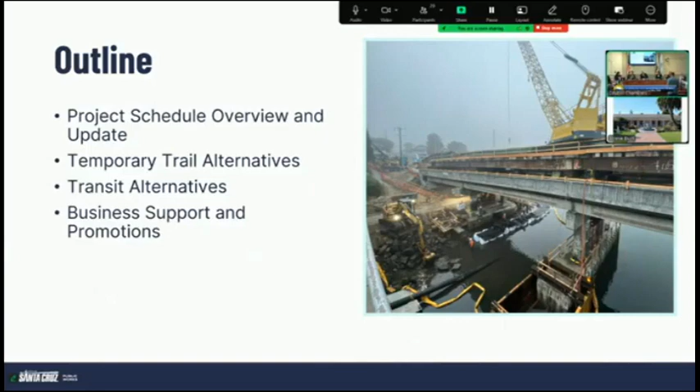We've got a quick outline of what we're going to cover. I'm going to touch on some key information about the project schedule, try to unpack why we're talking about a 3-year project, touch on how the project's funded. That becomes very relevant when we get into talking about what mitigation measures we can implement and how we pay for those. Then I'll hand it off to Matt to talk about trail alternatives we were directed to explore and other transit alternatives that have been put on the table. Finally, we'll close out with some other business support wraparound options.

Starting with some important things about the project schedule. There are a number of factors and considerations that go into how the contractor and the city came together to come up with the schedule we're operating off of. The most notable is that we have longstanding permit restrictions on when we can do certain activities in the water. Those are mostly designed around protection of marine life, specifically steelhead, one of the key species of concern. Multiple permitting agencies overlap with their permitting language, and those come together to represent the biggest challenge we have on a schedule front.

Some of the photos are all very recent. They speak to what we're doing right now, which is work in the water. We're pile driving, and that's really step one for the major construction on this project: building up below water to the water surface and up to the bridge deck.

Project sequencing, I just spoke to that. You can't start building a house from the roof down. You have to start from the foundation up. So we're doing the same thing on this bridge retrofit.

Maybe not a visible but really big piece of this project is relocating a sanitary force main that serves the entire county regional sanitation district. Roughly 5 million gallons per day flow through that pipeline. Part of our retrofit project is in conflict with that line, so providing a new home for that pipe is an important part of the sequencing discussion.

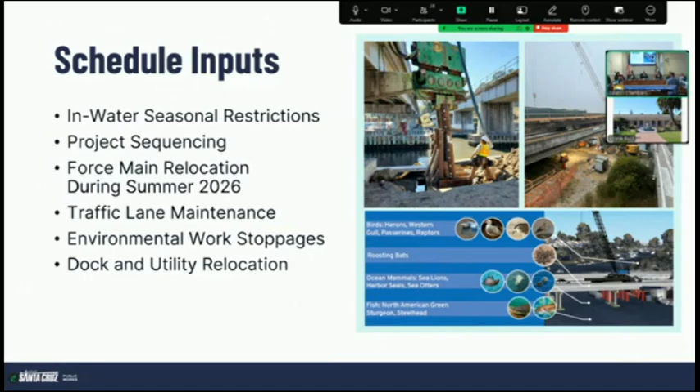This is the really simple version of the project schedule. The actual schedule is 18 pages long, and we're at the front end of the project, as you can see, through probably month 3 of the first and longest shutdown. I want to make it clear that there are 2 long full closures. We're in the middle of the first one, and there's a second one planned for next year, after which we're talking about 1 to 5 day closures to finish up resurfacing of the bridge deck and other minor things. This speaks to the sequence you have to build.

I mentioned pile driving, that's where we're at right now. We're taking care of all the pile driving we can this summer in the water, and then we'll be moving to the land-based piles.

There's quite a bit of that in the early phases of the project. Next summer, the big main event is going to be relocation of that force main. We're hopefully going to be out of the water by the end of next summer, which is a really big milestone because you start to get away from having to work in certain seasonal windows, which is a key thing for our contractor to then have more flexibility to progress on the work.

We've had some questions about Saturday work, so I wanted to address that. We've worked 7 Saturdays on the job so far, which may not sound like a lot, but the contractor has only had full control of the bridge since roughly July. Prior to that, PG&E was in the process of relocating all of their overhead utilities, which had to happen before our contractor could even fully take control of the project and start doing their piece of it.

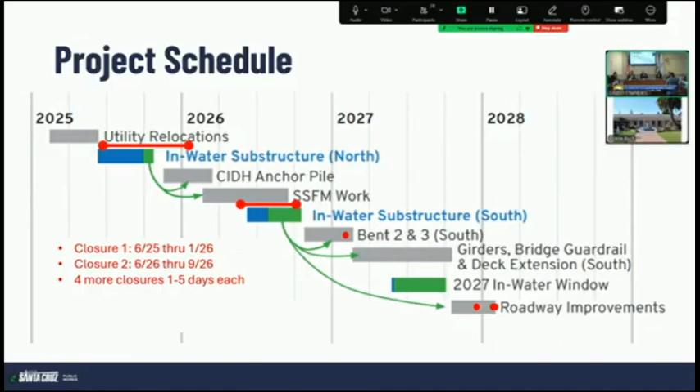We've worked over 52,000 hours, roughly, with about 40 people per day on average on the site. One of the earlier photos was taken at dawn. We've had 3 days just in the last week where we started at 4 to 5 a.m. to time the work with the tides. So we're trying to maximize every opportunity we can to make this project move along at as quick a pace as possible.

We're going to shift over to funding if there's no questions on schedule. This is straight out of our budget documents. We're currently projecting that the total project cost is somewhere in the vicinity of $70 million.

We have a local match that's covered 100% by gas tax, which is about 11% of the total project cost. But with that, external funding from the state and federal government comes with a lot of strings. All of the work we're doing follows their federalized procurement guidelines. Our contractor had to go through a very rigorous disadvantaged business outreach process as part of the bidding process, which again gets at some of the extra steps we have to take when involving this type of money in our work.

We've already gone through our first Caltrans-level pre-audit on the project 3 months in, so they do regular health checks on how you're doing with all your project filing. But again, it speaks to the level of oversight and control this project has with the funding. We've already approached Caltrans and FHWA about some of the things on the table for discussion today and whether those would be eligible through the approved funding for the project.

Specifically, a temporary trail was determined to be something that was not eligible, so we would have to look at other sources of funding, and we can talk about that later in the presentation. So all that said, although it's a very large and expensive project, we have very little discretion because there are lots of rules and restrictions on how both gas tax and federal and state money are spent. So I'm going to hand it off to Matt to talk about some of the trail alternatives.

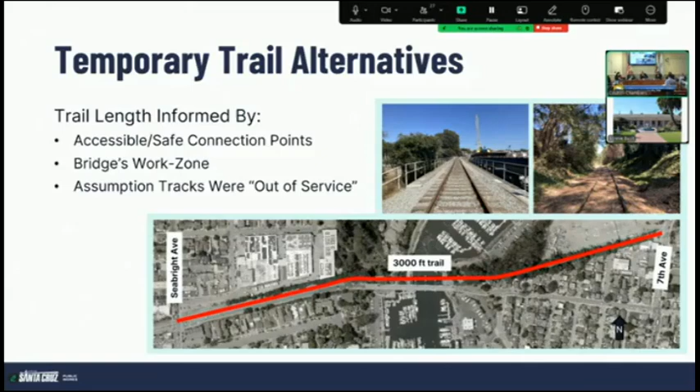So we looked at 4 different options here: a pedestrian path, what we're calling the intermediate trail, a trail with just decking, and the interim trail, which was studied as part of rail trail.

The pedestrian path we looked at was 4 feet wide, which fits within the existing rails. At that width, though, we wouldn't be able to accommodate bicyclists very well.

So we also looked at what we're calling the intermediate trail, which is an 8-foot wide trail placed on top of the existing tracks. That would avoid doing any sort of significant drainage work, and at that width, we can accommodate bikes more easily on the section.

We also looked at a wider option, which would be building a deck on top of the railroad tracks. This would allow us to provide the widest path possible to make it easier to use without impacting drainage or the tracks themselves. And then we went back into our project files to look at the interim trail that had been studied as part of rail trail.

That was a very generous wide path at 16 feet. It actually fully removed the tracks, but did have some drainage implications with that wide section.

With these 4 options, we found that prices could range anywhere from $650,000 up to $7.4 million. We based those on work that we've done in the city to date, and we also received a price from the contractor on the project for the intermediate trail, so that $900,000 to $1.2 million price tag, depending on if we pave the top or not, is a number that we feel really good about.

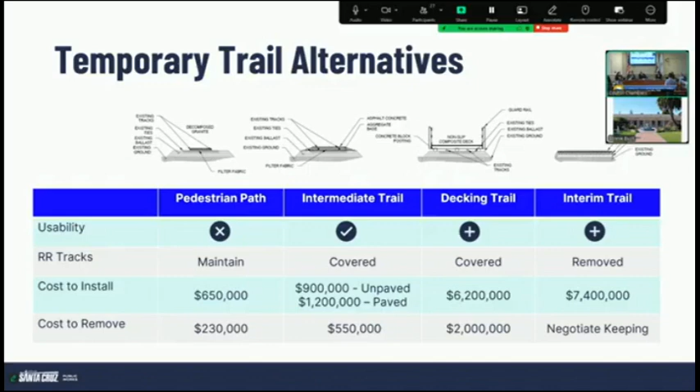To pull off the trail, a key thing would be to think about funding. Kevin mentioned some of the challenges with the project. We would need to get some direction today if we're to move forward with the trail to identify extra funding for the project. Luckily enough, there is currently a call for projects underway from the RTC, and there's $8 million available in what's called RSTPX funding.

I bring that up because typically transportation funding requires the investments to be in place for 20 years. And so we'd be looking at doing some sort of demonstration or interim project. And so that particular funding source is very important if we're interested in going after it.

With those sort of grant funding opportunities, there's always a local match that comes into play. In this source, it would be 12%. So if you had a $1.7 million project, we'd be looking at needing to find about $200,000 in local funding to complete that work.

Beyond the funding, issues with doing the temporary trail alternative, there's still the sort of typical project constraints that we would need to work through: environmental clearances, permits. We are working through seismic analysis on the Harbor Bridge right now through the rail trail that we would need to get results back in December on.

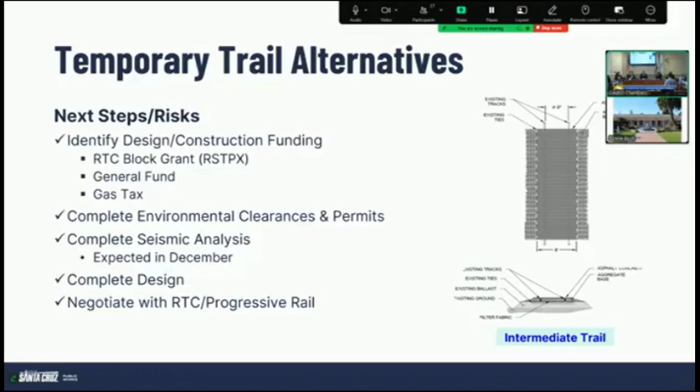We also looked at parking alternatives. This seems like a pretty easy one to implement. We recommended doing 2-hour parking in the lower Seabright area. Currently, we don't think that'd be a big impact to the revenue that we receive.

It is important to remember, though, that we use meters to ensure that we have curb turnover in front of businesses. So we do recommend that we maintain a 2-hour parking overlay in that area. We would need to come back to City Council to sort of retroactively update the municipal code if we do receive that direction.

We also looked at transit alternatives to increase usage in the area. Four different ideas we looked at.

First one being considering the TIG-M demonstration train that happened a while ago. We could further investigate that idea, but there's certainly challenges with stations and how the train service would actually work, so it would be a really challenging operation to pull off.

We think one of the easier items to work on is to have us engage with Santa Cruz Metro on working on restoring the Route 3 into Seabright. Currently that route has been detoured. Our understanding from them is that the additional travel time in the area makes it difficult to serve here. So we would consider adding, if we were to add transit service, work with them on what sort of capital improvements, perhaps dedicated transit lanes, might be needed to ensure that operation.

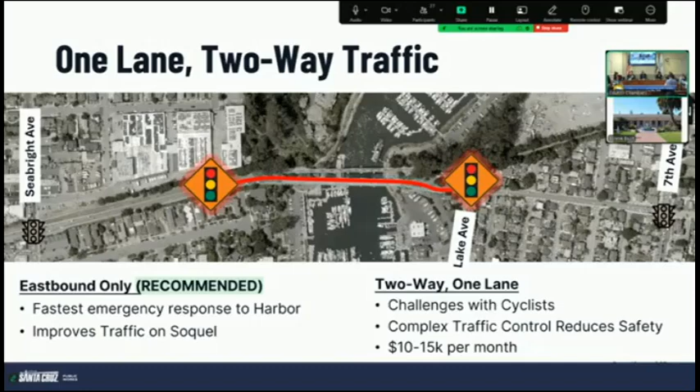Ms. Unitt, good afternoon, welcome to the council meeting. Good afternoon, Rebecca Unitt, Economic Development Manager with the City of Santa Cruz.

So I wanted to give a little bit of an overview of some of the community and business outreach that we've done on this project, both prior to the start and as we've continued through.

As Nathan mentioned, this project has been on the books for quite a while, and council and various commissions have reviewed this, as well as the city's communications channels through press releases, our project website, and project newsletters.

As the project began, there was a community meeting, and we followed that up with a business meeting with the Seabright businesses to give them more detail into the project scope and hear feedback from them about what they'd like to see in terms of support and various other requests and questions, much of which Matt has covered as we've gone through that feedback.

We've also done business walks, which is standard for a lot of our projects, to go out and meet in person and deliver project information and contact information to the businesses around the project site. And then we'd have ongoing email communication, meetings as needed, in-person outreach as needed, as well as project feedback surveys to get some insight from the businesses directly.

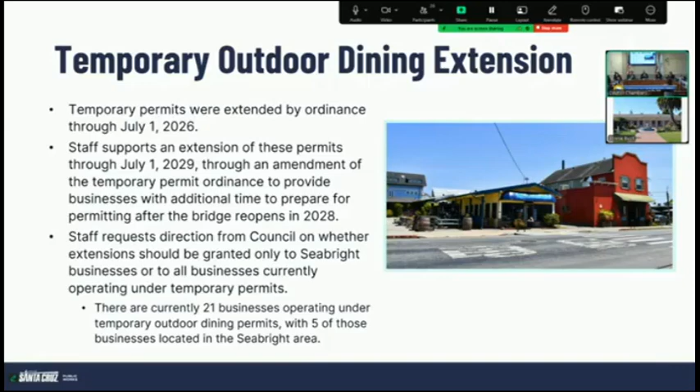Just to dive in a little deeper, we gave a few samples of event ideas to put out there, and we're happy to talk with businesses more individually, or if people have ideas, feel free to send them my way. We're looking at how we can support activating these events, either putting out a request for proposals to provide some funding for these events to occur, or doing a sponsorship if event producers would like to get some subsidy on their costs to put those on.

And then just solidifying project communications going forward. I will be serving as the business liaison to businesses on this, and Ashley is our community relations specialist on more of the larger project questions going forward. Hand it back to Matt.

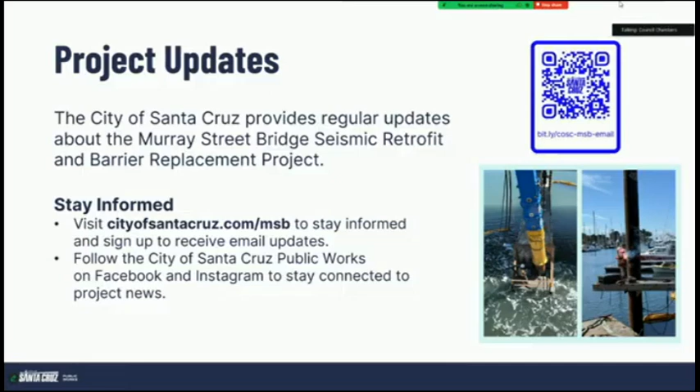Thank you, sir, and thanks to each one of the folks who made presentations. Let me ask if there are questions or comments by council members.